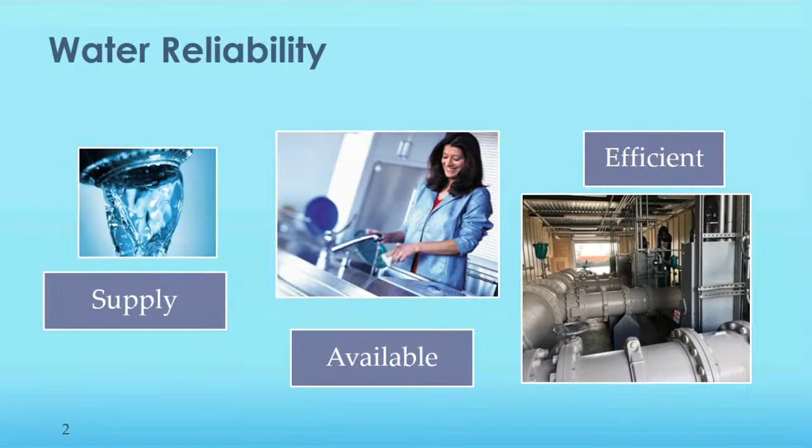And we look at this every year, comparing these same metrics to last year. So looking at how we're measuring ourselves, we measure ourselves against industry standards. We develop these standards based upon our neighboring water agencies, but also nationally. These metrics and benchmarks are provided by the American Water Works utility benchmarking data.

That's the first one. We also look at the California water audit results, examining water efficiency metrics throughout the state. And when we look at public safety and how we're doing protecting our customers from fires and fire flow availability, we look at the Center for Public Safety Excellence.

You'll notice all these metrics use the same graph. Based upon the group we're measuring ourselves against, if you're doing poorly, you're in the lower 25th percentile. If you're doing well, you're in the 75th percentile. Our goal is to be in the 75th percentile in all these metrics, and you'll see a line showing where we're at in each one as we go through.

Now that we've done this for a couple of years, we have a comparison, and we're going to be able to tell what the trend is in our water system.

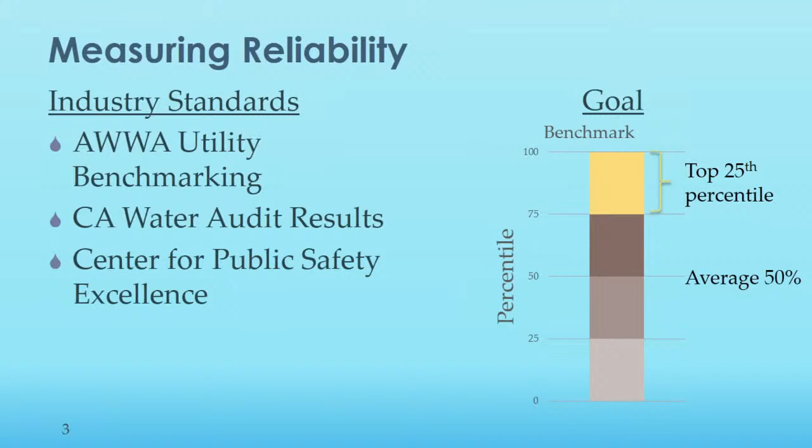So the first one we're going to look at is water supply and our equipment availability. We have our two largest sources of supply up here on this graph, one being the Lenain treatment plant, that's our imported water, raw water that we treat. The second being our groundwater.

You'll notice with the Lenain treatment plant, that's much below our goal. Our goal here is to have it operational 95% of the time and out of operation for only 5%. That 5% is needed for us to clean and maintain the facility, which allows us to take it out of service typically about 3 weeks out of the year to clean it and put it back in service.

This last year we were at 45%, and that's because the first half of the year the plant was down due to construction and upgrades we were doing up there. It came back online the second half of the year, so that's why it shows here it was operational for 45% of last fiscal year.

It's been in operation continuously since it came back online in January. We did take it down for service at the end of October, and it was out of service for just under 2 weeks. That's the first of its 2 shutdowns we're going to do this year, and that used about 2%. So we're looking good to be back at our goal for the treatment plant next year.

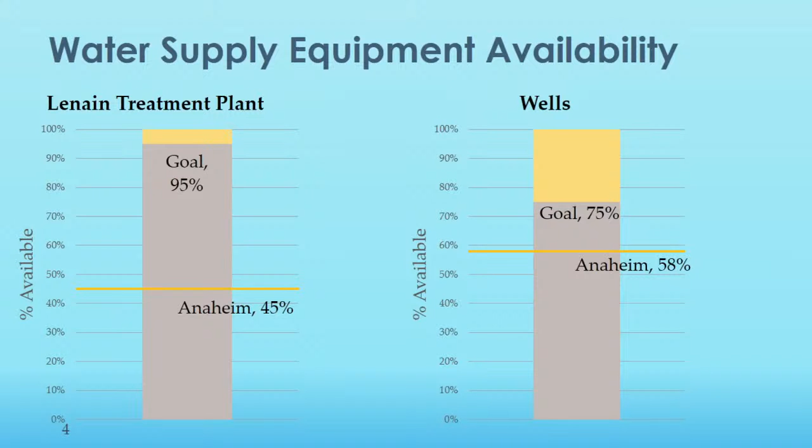The wells, as you can see here, are also down, and that's because of the groundwater contamination with PFAS that required us to shut our wells down. If you recall, we have 15 of our 19 wells down.

So improving those metrics this coming year, we think the Lenain Water Treatment Plant, as I mentioned, is operational and the upgrades were very effective. We replaced a lot of the aging infrastructure we had up there, such as our ozone disinfection system and our chemical injection systems, and the plant is operating very well and very efficiently at higher capacity too. Remember, we increased it from 15 million gallons per day to a 20 million gallon per day plant, so we're operating at a higher capacity too.

The groundwater treatment, the groundwater wells are going to remain off. That metric will actually fall below what it was this year. We're operating around 20-25% of our water supply from our groundwater wells, and that'll continue until we get our groundwater treatment plants designed, constructed, and in operation. The plan is to get the first one back online in 2 years.

And we're putting together a solicitation to award those, which will hopefully be awarded this spring to a design-build contractor to bring on our first treatment plants in a couple of years.

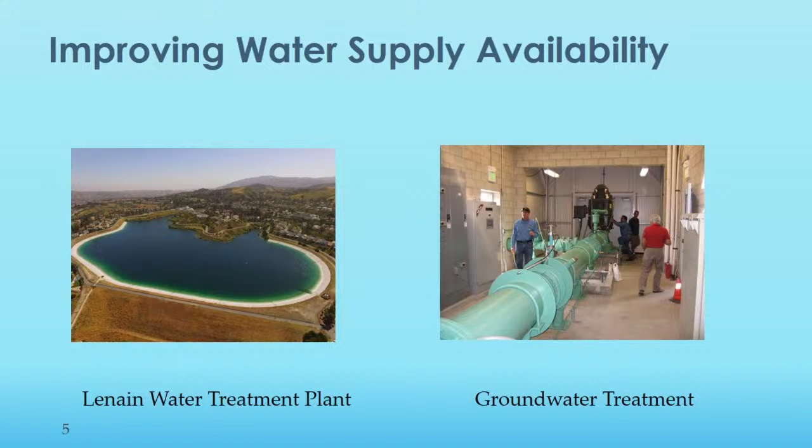The next metric we want to look at is availability, the disruption of service to our customers. We look at how many disruptions a customer has per 1,000 meters in our system. An unplanned disruption is the interruption to one or more services of a customer. It could be because of a main break, or because the service lateral going from the main to the customer's house leaks. It could be for many reasons.

This year we dipped below the 75th percentile. You can see here we're at 0.69, which we dropped this year. A majority of the unplanned outages, you'll see later in this other metric, is due to not necessarily main breaks, but because the service laterals broke.

We saw a number of these happen, a big increase, and as we looked into why so many services were breaking, we found we did have a higher number of services affected, but also a concentration of services and damage in one particular area. You guys probably drive by this all the time, the construction going on at State College right now, installing the large underground sewer line.

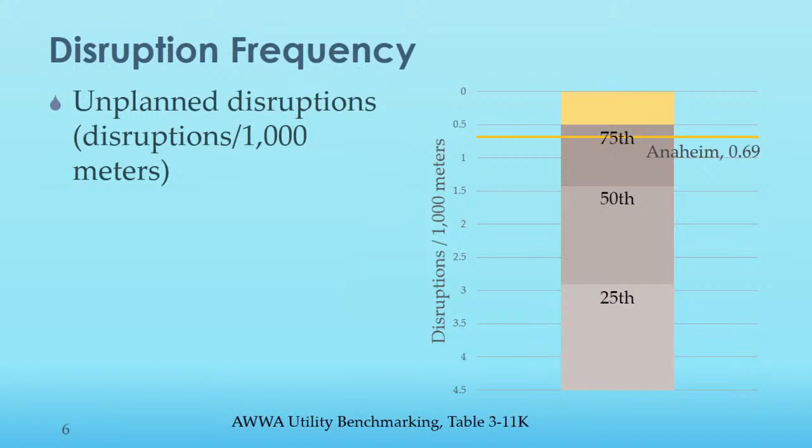Due to that construction, they're driving very heavy piles into the ground to put in that pipeline, and it's vibrating and breaking our services and our water mains. We've been out there several times in the last 9 months repairing those services and the pipeline in that area. So that's one reason we've seen a drop in this particular metric.

The other metric we look at is the disruption duration. Once the service is out, how long does it take to get that customer back in service? We stayed about the same as last year, just a slight improvement.

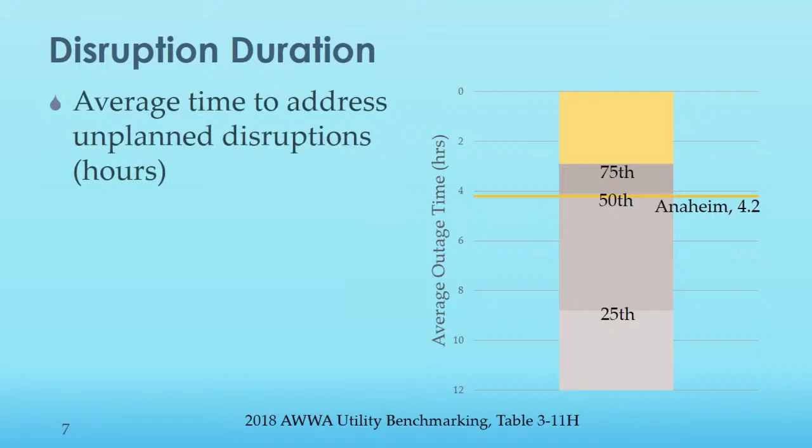What I want to show with that video is that not all main breaks are the same. Some of them are large, this one took up an entire street and several services, where others are very small. But with that main break on Imperial Highway, and some of the other main breaks we had, we saw the need to be able to get back out and do these repairs quickly to prevent them from happening again.

We look at two things we need to do to minimize the impact of those main breaks in the future. One is replacing the valves in our system quicker, and we didn't replace as many valves as we wanted to this year. We wanted to replace several hundred valves, and we didn't do that. We replaced around 100 valves this year. We also want to be able to get back out and replace pipes faster once they are broken.

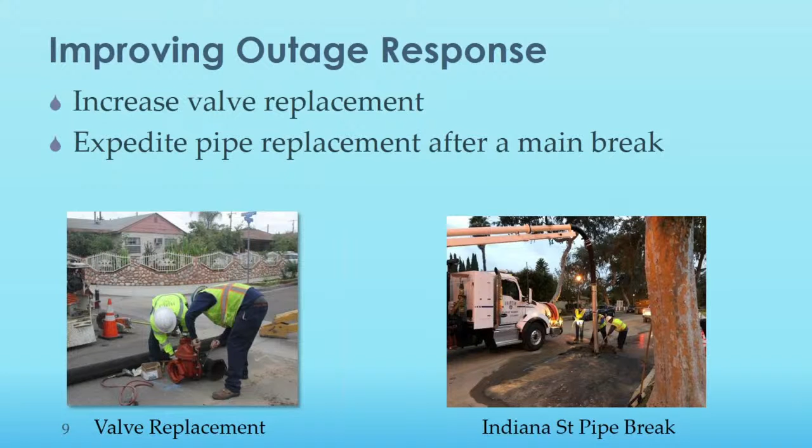The next metric that is actually good news is our main breaks, the number of main breaks we have. We measure the number of main breaks we have per 100 miles of pipe, and we compare that nationally throughout the country. Naturally, because we're here in a drier, more mild climate, we don't see as many main breaks as they would in Minneapolis or cold areas where frozen temperatures cause pipes to contract and break more often.

So we are doing very good. We have increased and improved this metric over the years slowly, largely because of the increasing investments we've been making in replacing our aging pipelines throughout our system. But it's not just a matter of replacing pipes that are old or of a certain material, it takes a more strategic approach on how we utilize that capital investment to make sure this metric, our main breaks, stays low.

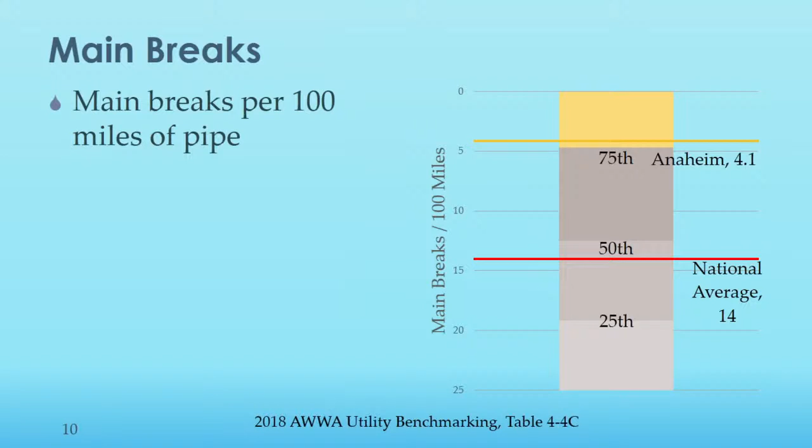One thing we invested in a couple of years ago was an asset management approach to our main replacement. What this does is take into account a lot of factors, a lot more than just the age of the pipe, to determine whether that pipe should be replaced.

We take into account a whole bunch of factors that determine the likelihood that a pipe will fail, and also the consequence of that pipe failing. If the pipe is in an area that won't have any customer disruptions, that may be a low consequence. We put those two things together and rate every pipe throughout our system to determine where is the best place for us to spend our limited capital improvement investments. We believe this strategic investment has been effective and will be effective in the future to help make sure our main breaks per 100 miles stays within our goal.

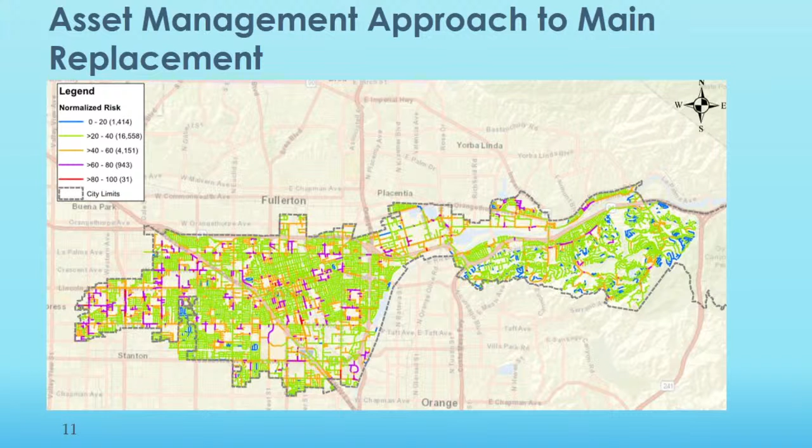The next metric is public safety. The fire department looks every couple of years with the ISO to get a rating. We're currently rated as a Class 1 system fire rating, and we want to keep that because it relates into lower fire insurance bills for our customers, our residents. We've scored very high for our public safety, for our water system, because we maintain our fire hydrants, we maintain the valves, and we have good fire flow throughout our system.

I have a question. How did you come up with 37.66? Is that some kind of assessment, factoring, stuff like that, or how did you come up with that?

Yeah, the water portion of it is called the Community Fire Service Performance Review. A group comes out to Anaheim on behalf of the insurance association organization, and they rate our system. They look at several things: how many fire stations we have, their response times to fires. One of the things they look at is a category for water - what is our pressure, how much water can we get out of each fire hydrant, helicopter fire protection for wildfires, and how often we maintain our fire hydrants. We took that category of this overall rating, and that's how that rating was a 37.66, which is based on the Western region average. That puts us up near the very top.

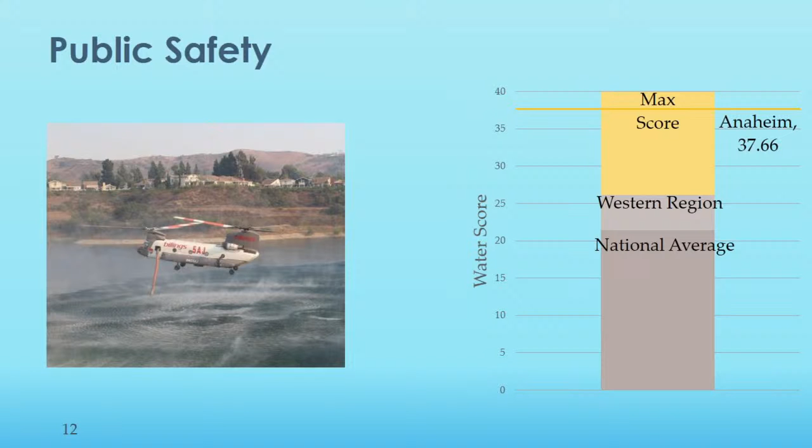The last one is efficiency - how efficient is our water system, how efficient are we managing this resource throughout our system. This metric takes into several different categories with benchmarking throughout the nation, and this one actually increased significantly this year, from the 50th percentile up to now well into the 75th percentile.

It primarily increased because we didn't have our water treatment plant online this year. You might wonder what that has to do with efficiency - we use a lot of water backwashing and discarding it in our water treatment plant operation. Because we weren't doing that, it artificially raised this number. So I wouldn't get too caught up in this being what the number will be in the future. This will come down. We know we have work to do with water efficiency, as we presented last year.

One of the biggest things we know we need to do is replace our aging water meters that we have out in our system. We know that when we do an AMI program sometime in the next few years, that will take care of that. But we do know that this metric will come down next year. Some of the things we are doing though...

Question: when we do flushing for water quality purposes, does that also get included as part of this calculation? Yeah, there's a lot of things - when we flush water from our fire hydrants to clean the water system, when we lose water through a meter that may be inaccurate, to the water we use at the water treatment plant in our operation, all that goes into this amount, this water loss.

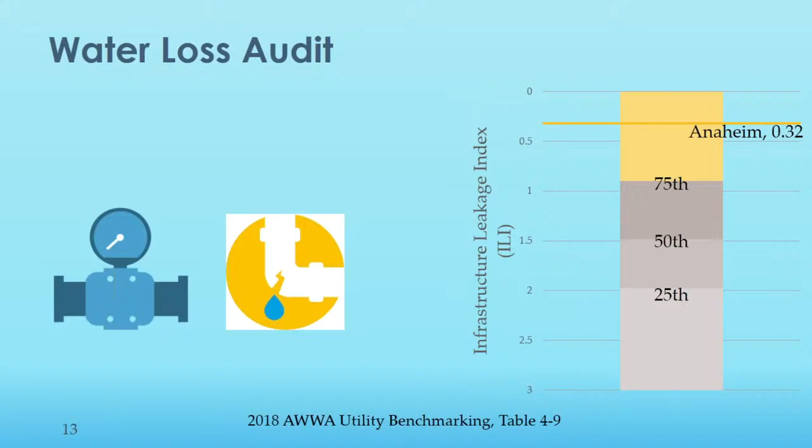So a couple of categories of things we are doing, in addition to wanting to replace our meters, is our large meters, where an inaccuracy has a big effect on losing revenue and losing water. So one thing we're doing is investing in portable meter calibration so we can go out to these large meters and test them ourselves more often to find out which ones are inaccurate. If they're inaccurate, we repair them or replace them, which will improve our cash registers that calculate how much water we sell to customers, primarily the large customers.

Is the meter for pressure or for flow rate? For flow rate. We want to know when the meter that's in the ground, that we read every month, is not reading accurately. We want to figure that out quickly, so we have these portable calibration devices that we're able to take out there.

Another place where we can lose water, bringing our water loss values down, is leakage in our system. Underneath the ground, our pipe is usually 3 to 5 feet below the surface, and it can leak water through little cracks or big holes. Because we have sandy soil, it doesn't necessarily bubble up to the top like you saw in that video of Imperial Highway—it often saturates and goes down. We will never know where those leaks are unless we dig up the ground and see it.

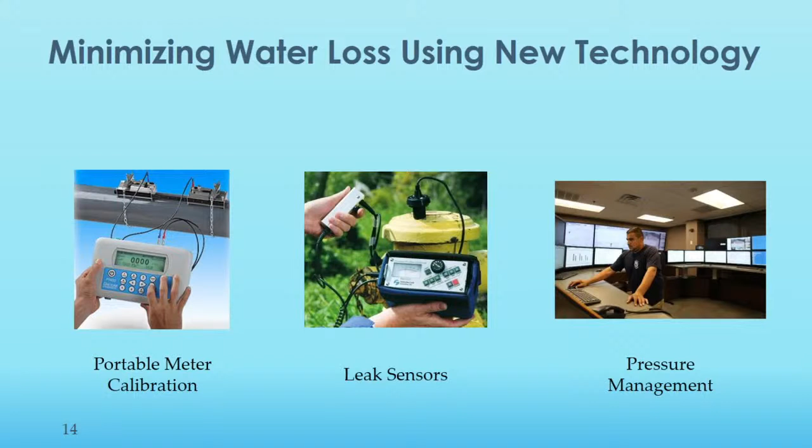So with that, I'd like to report that we're happy with the results of this year's water reliability. We know we still have some work to do and lots of areas we can still improve. We feel we're on a continual path of improvement, and we look forward to answering any of your questions.

Any members of the board have any questions? Member Roman? Yes, do you have last year's results compared with this year? I want to see if there's any improvement, or some kind of comparison.

Yes, I do. For each of these, I mentioned whether we're improving, staying the same, or getting worse compared to last year. I think one of the things we'll probably do in the future is look at a trend line, because I think that's what you want to see—the trend over time, over 3, 4, however many years. This is really our second year doing this, so in the third year we'll have more data. So instead of seeing one chart, you'll see maybe 3 charts and can see that trend line, and going forward be able to do maybe a 5-year look back or extrapolate the line, just a straight line. Right, that's a good point. I think that would help identify—we went down because of Lenane, or we're back up because we finished something—so those are good points to make. Thank you. Any other questions from members of the board?

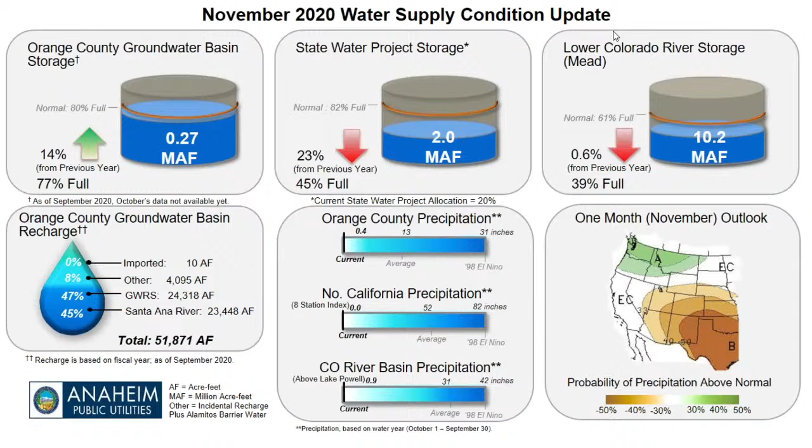Other updates I wanted to provide on our water system: our Lenane water treatment plant was down offline for almost 2 weeks for our biannual cleaning. We didn't find any problems, and all the new equipment we installed is performing well. We just had a lot of normal cleaning to do, and it's back in operation and functioning at full capacity.

As Brian was talking about the need and desire to set the rate hearing because of PFAS, you may recall Craig Parker presented back in September on our PFAS groundwater treatment plant program. That's largely to bring our lowest cost water source, the groundwater wells, back online. It's cost us about $15 million a year more to buy imported water because so many wells are offline. The sooner we get those wells back online, the less cost and impact to customer rates.

The desire is to build this program as quickly as we can, so we've gone ahead with the design build delivery method to try to bring 50% of our well capacity back online within 2 years. We solicited a request for qualifications from design build contractors and received 9. In October we shortlisted to the 3 highest qualified, and sent out the request for proposals to those teams last week. They're now working on proposals we anticipate awarding in spring, which we'd bring to the Public Utility Board and then City Council. We're moving as fast as we can, expediting both procurement and delivery.

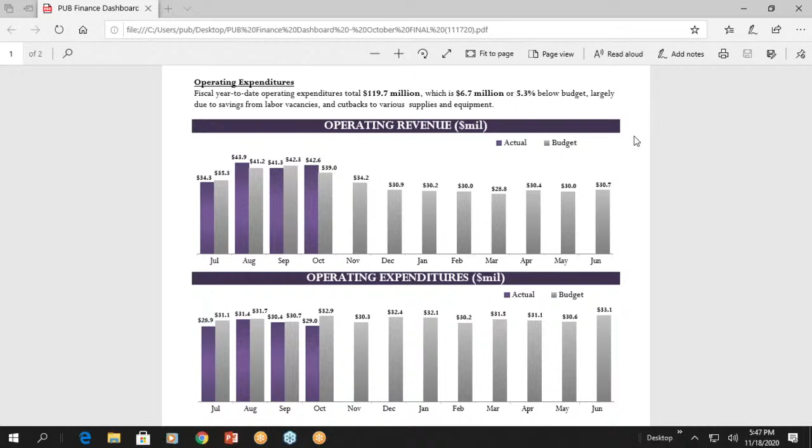If you scroll down further to water, our water revenue is soft, and a lot of that is due to the shelter at home, with hotels empty, et cetera. We are seeing some softening in the commercial industrial sector, reflected here. There's no wholesale market on water we can take advantage of, but there's a corresponding drop in our budget as well, so it's about a wash on the water budget. We just hope this continues through the balance of the year. There's no guarantee of that, but that is our hope.

With that, that's my only item tonight. Next month it's going to be the same, I'll present the dashboard this way as well, because it's an early board meeting next month, so we'll have just closed the month right before the board meeting.

Happy to answer any questions. Any questions from members of the board? Hearing none, thank you. Now, next item on the agenda is the update on power supply issues.

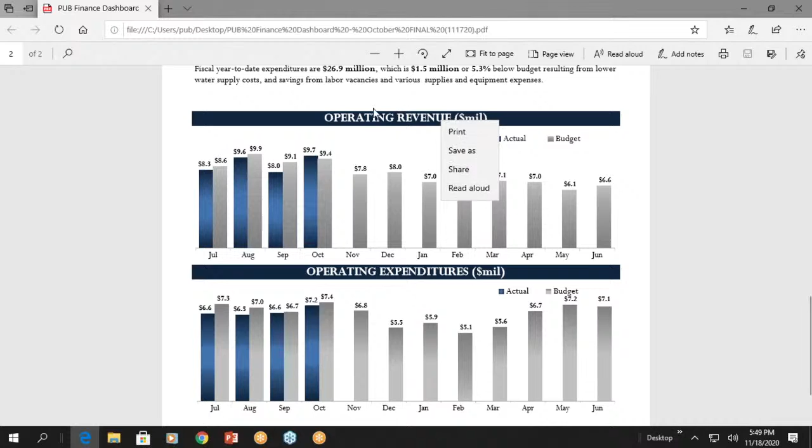Okay, so we're going to have Sean Smith, our integrated resource manager, give you an update this month. Hello, everybody. Just if Peggy could put it up there for us.

One second. It's not up there, Sean. It's in their packets. Okay, great.